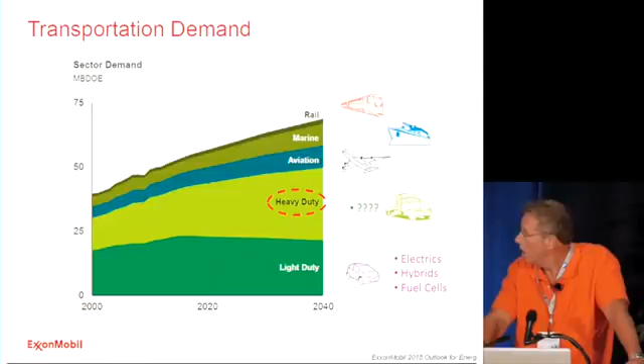If you look at that in terms of what it means for fuels, diesel is the fuel that people think of, but a diesel engine does not have to run on diesel fuel. Diesel fuel is a portion, a cut that you take from a hydrocarbon barrel that's really nice for doing this in the traditional sense. But if you do it in the sense that we do it, where we want really high efficiency, things that you would not think of as being good diesel fuels actually become very nice fuels. In fact, in my opinion, better fuels for a diesel than diesel fuel. So I want to separate the two, diesel style combustion or a diesel engine, from diesel fuel.

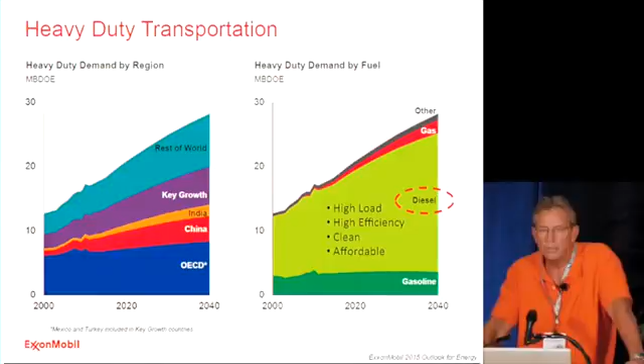What we need to do, if we're going to try and satisfy this in a way that fosters development and works for the environment, we have to handle high load. The reason why the diesel engine is used is the harder it works, the hotter it gets, the more this style of combustion likes it. You do this with a spark-ignited engine, you get knock. When you get knock, you pull the spark back, you lose efficiency, you lose power. It's just not really the right thing to do for high load. You want it to be high efficiency. Efficiency has sort of been rolled back as we've gotten better at dealing with pollutants. It needs to be clean, of course, and it needs to be affordable, and that's the other challenge - as you've begun to roll back soot and NOx emissions, the cost of the after-treatment system has become very high, and so we need a better idea.

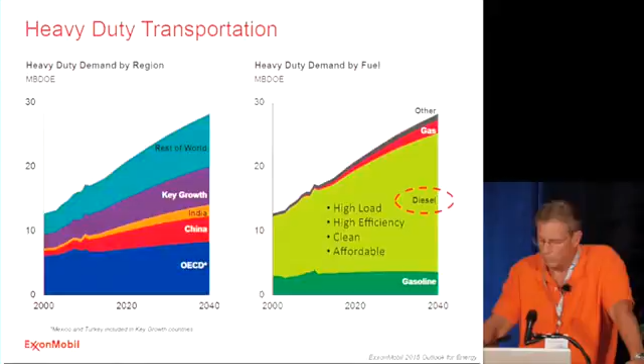Okay, so where do we stand in terms of engine efficiency? To the left, you have a spark-ignited gasoline engine. To the right, you have a turbocharged diesel, just mildly turbocharged, and this is pretty much what we have today.

I'll pull the glasses off, see if I can do it this way.

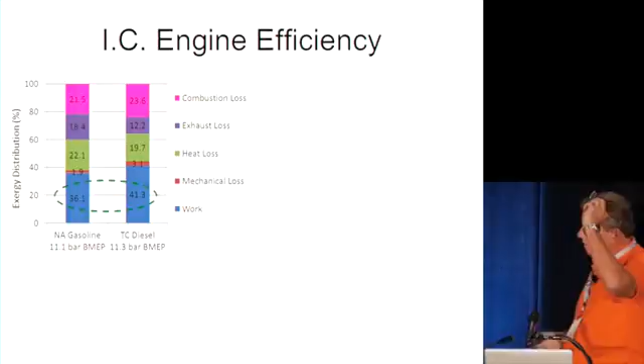If you look at the amount that goes into work, this is an exergy breakdown. Exergy is the amount of work you can get from a resource. The one over to the left is modeled roughly on a Prius sitting on its sweet spot, so about 38% efficient on a lower heating value basis, about 36% on an exergy basis. The other is a small bore direct injection diesel, 42 or so on an exergy basis, maybe 45 on a lower heating value basis.

The problem is the first 20+% of the work potential is gone because you do an unrestrained chemical reaction called combustion. If you do it perfectly, you kill 20% of your work potential just from entropy generation in the system. That's hard to go after.

You can only go after it either by changing from combustion to a restrained reaction, which is what fuel cells do, or by going to extreme states. That was another program we did for GCEP. You can get about half of that back in a combustion engine.

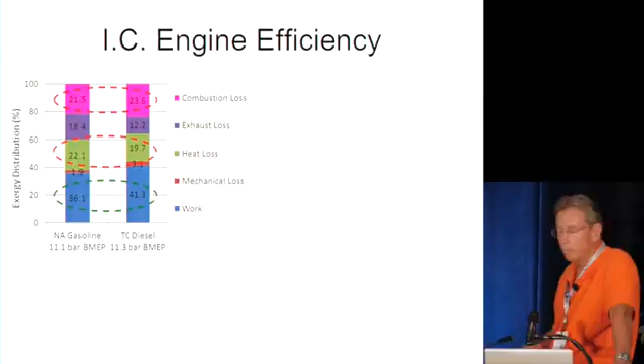But here's the part that really offends me: it's this part that's in heat transfer, because most of that energy is destroyed as you go across the thermal boundary layer before you even hit the wall. And so that's just got to go.

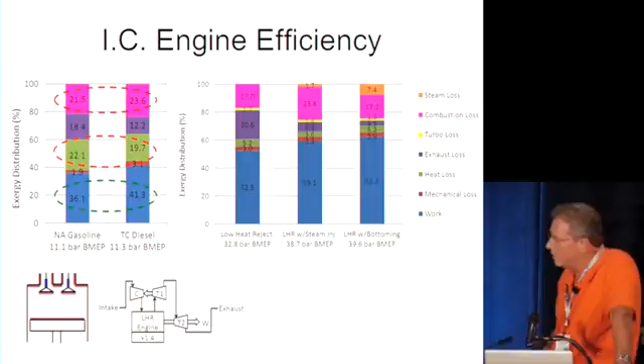So if you attack that with thermal barrier coatings, what are called low heat rejection engines, here are a couple of options. If you insulate a bunch of surfaces, the little graphic shows the same stuff sprayed on gas turbines, mostly YSZ, about 1 to 2 millimeters thick. That cuts the heat transfer losses, but it shifts most of that energy into the exhaust enthalpy.

So you have to be able to take that and extract it somehow, you have to get work out of it. Some of that you can get with a turbocharger, some from overexpanding. I'm a big fan of overexpansion because you don't want wickedly hot exhaust hitting the turbine stage on the backside. So to the extent that you can do those linkages, you want to do it.

And you can even turbo compound that. If you do that, you get the bar over to the left, where we're starting to creep up into some interesting efficiencies in the 50% range.

If you pull out all the stops and either do a regenerative bottoming cycle like a steam injection cycle, or put in a full steam bottoming cycle or an organic Rankine cycle depending on the temperature you have, then you can move over to the other side and get into the mid-60s. So really what we're after is how do you get to high efficiency.

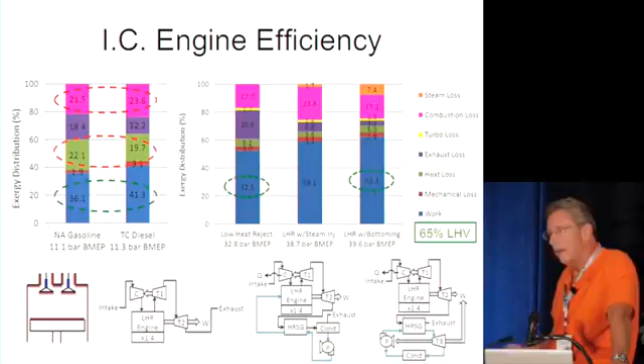Reality check: can you do some of these things? You can buy a turbo compounded engine from at least 2 companies. I don't know, maybe GE's got one lurking in the background too, you never know with them. Detroit Diesel and Scania both sell them commercially.

Lots of people have been looking at how you might package bottoming cycles. GE already does that for their large engines, but whether you can do it on board a vehicle is another question. People are looking at that.

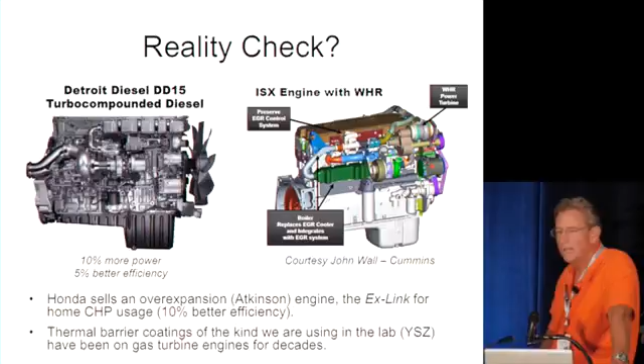There are Atkinson-style overexpansion packages. Honda's not selling it anymore, but they have a really nice geometry that does 1.4 times more expansion than compression, which fits nicely. And GE has been spraying YSZ forever on surfaces, so I don't really think that's a huge challenge.

If you go after the heat transfer loss, just because I want that exergy back and I want to make it more efficient, this is what it might look like for different pieces. You definitely want to do the head and the piston for sure. You really have to go after the valves and the ports, because you don't want to heat things up before they come in, and you have to transfer that enthalpy to whatever the next extraction stage is downstream. So it's not just about in-cylinder stuff.

But the other thing that you don't really care about, at least in my opinion, is the liner.

There was a big program in the 90s on low heat rejection engines funded by the Army, and it came to a couple of conclusions. Ceramics are really tricky. What are you going to do about the lubricants? And you've got to extract this energy out of it, and the combustion was a little hard to deal with.

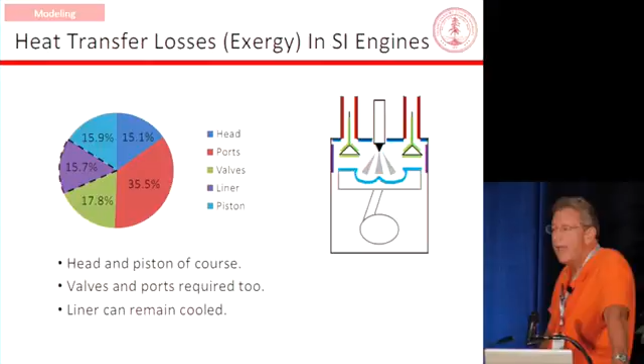In my way of thinking, you go for about half of the loss. You leave the liner alone, you leave the lubrication alone. You do the upper part, and you can get about half the heat transfer, a reduction of about half, and you redeploy that. How do you do that?

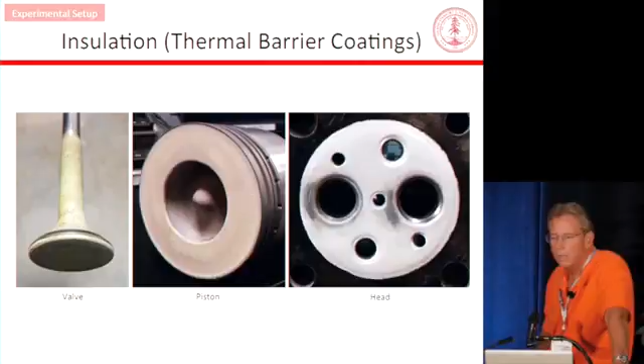You spray stuff on. So some of this is sprayed, some of this is cast. There's a whole bunch of different methods, but those are our valves, bowl and piston, that's our cylinder head, and basically we've got YSZ on those, a couple of millimeters thick.

Doing the experiments becomes a little interesting and tricky. We have single cylinder engines. We do all this stuff on a custom cylinder head that can take the pounding, the lack of heat transfer, all the crazy things that we do to it, including putting transducers and injectors in crazy places. We put the coatings on it and we measure what's going to happen. It's really good in that it can tolerate all these things and do crazy research stuff.

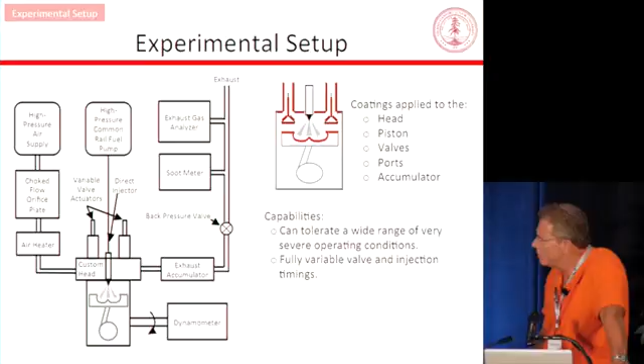We've got fully flexible injection and VVA and all that stuff. But there's some things you can't do with a single cylinder engine. One is you can't turbocharge it because it only breathes out once every 4 strokes, it only breathes in once every 4 strokes, and it would be a ridiculously tiny turbocharger that nobody would believe the results from anyway. But we can model turbochargers, so we modeled the turbocharger.

You'll also notice that we've got tiny little valves compared to a real engine because we've got real estate for fuel injectors and everything else, and we need structural support and all that good stuff. Our intake side we force feed it, so we're not worried about that, but the exhaust valve is small, so we have a very tight exhaust system. But that's okay, we can model around that too.

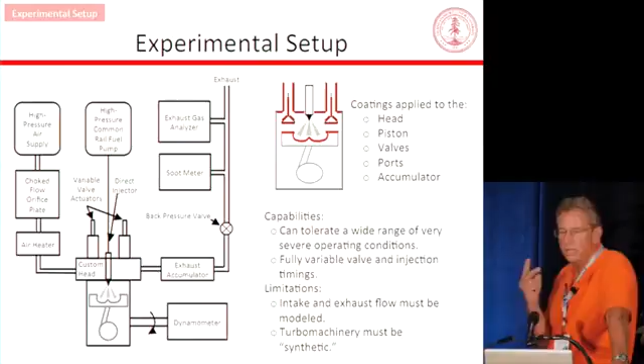So we do a combination of experiments and modeling to figure out what will happen. And that's really important. The stuff that you can easily model, we model. The stuff that you can't, and you've got to go to the experiment, is the combustion and the heat transfer. You've got to experimentally measure that. So it puts us in kind of an interesting experimental regime.

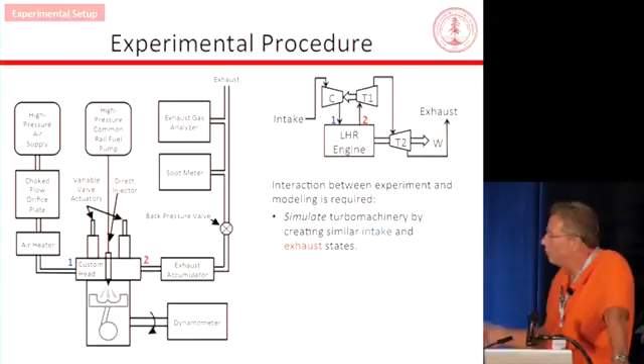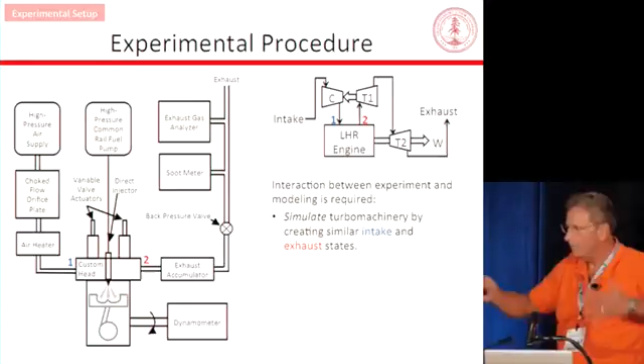So what do we do? We integrate those two together. We simulate the turbo machinery and we create simulated intake and exhaust states across it. We boost on the front side according to a compressor map from a turbocharger. We back pressure the exhaust to get the right amount of work with the efficiency on that. So we've kind of boxed in the combustion process in between those two.

Then we measure the heat transfer in the combustion process, because those are so nonlinear we're never going to model those with any sort of confidence. And we combine it, so we use our modeling to get back to what we think can happen in reality.

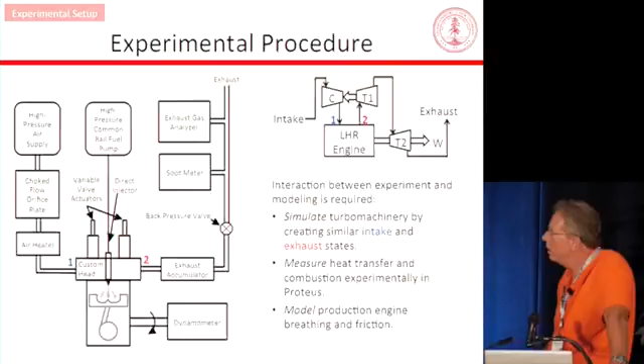In order to do that, you have to be able to model things. These are modeled and measured. For the actual experimental stuff, it's not that hard to do anymore. It's not a state-of-the-art thing. I teach people how to do this in class.

And so we get two sets of results, the research engine results at the bottom and what they would be in a production engine, sort of reasonable friction, turbocharger, valves, all that good stuff. And if you look, this is one of the cases with turbocharging. We can get the efficiency up about where it would be in terms of what our modeling would say, with a very significant increase in power density.

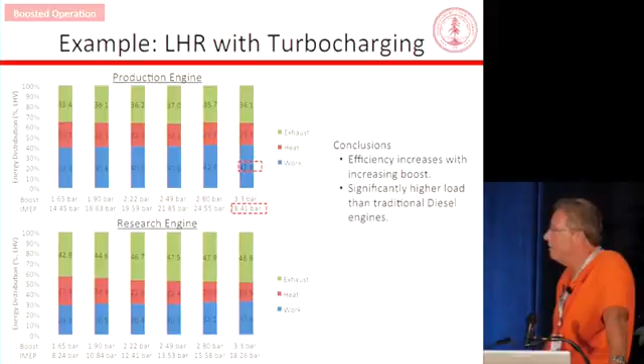So I don't really like the low temperature strategies. Low temperature strategies are great for some emissions reductions things, they cut heat transfer, but they cut power density. And engines are supposed to work for a living, so I prefer to raise the wall temperatures and raise the combustion temperature inside of it and get more work out of the engine rather than less. But basically it says that we're on track.

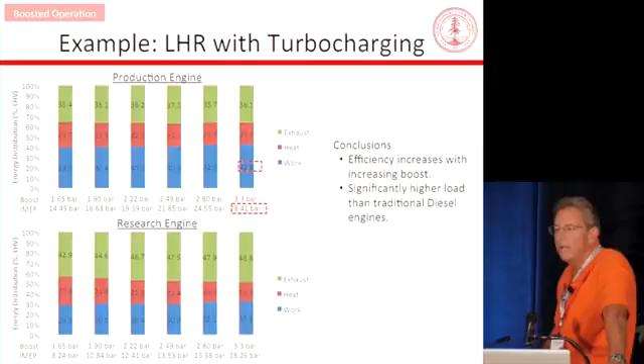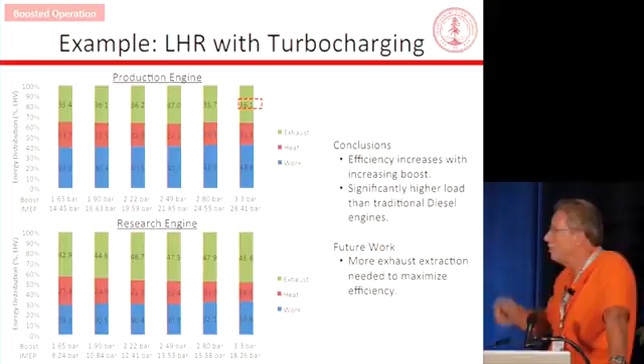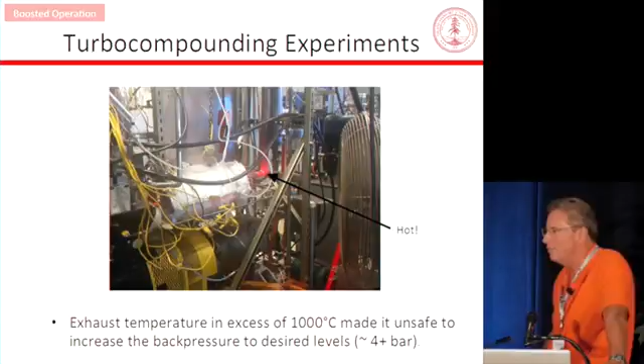We have a little more heat transfer than the 50% reduction we would have wanted, but it's also sort of Gen 1 thermal barrier coatings and all the rest. For sure, we need to do more extraction. Turbocharging is just the minimum version. Turbo compounding, we've done other experiments, but when you start to have significant enthalpy flows coming out of the back, as the graduate student who did this pointed out, it gets hot. And when it's hot at 1 bar, that's not such a big problem, but when it's 4 or 5 bar and made out of mild steel and starting to creep, you have to be a little bit careful about that. But that's okay, we learned what we needed to learn from that.

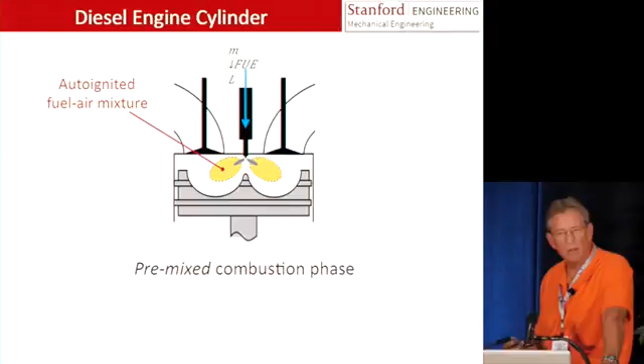Here's the 30-second version of where soot comes from. You've got an injector inside the cylinder. You squirt diesel fuel, pretty reactive, into very hot air. It doesn't ignite immediately, so it mixes a little bit, forms a little plume. That plume goes off, okay? It's called the premixed combustion phase. That's not our problem in terms of emissions. That's a bit of a problem if you talk about knock or being noisy in a diesel, but it's not really our problem. Our problem is when you burn the rest of the fuel in there, the mixing controlled phase.

You've got fuel down the middle, the oxygen's on the outside. You've got to get these two to meet each other. If you don't do it, you crack the fuel. Thermodynamically, it wants to become carbon and hydrogen. It's not going to get to thermodynamic equilibrium, but it's on that path, and that's what's driving it. And that's why you're going to make soot.

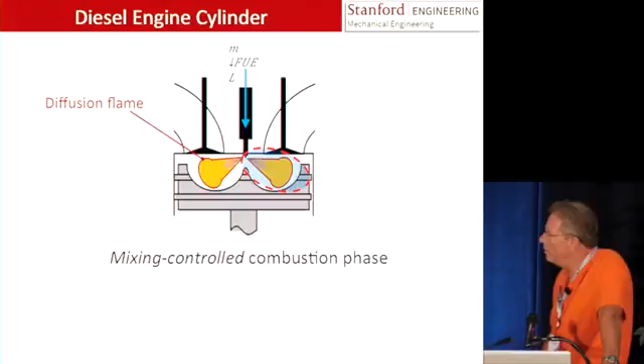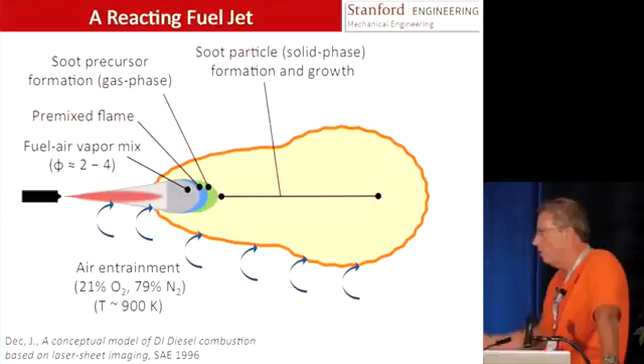Probably the easiest thing to do in terms of having diesel-style combustion and not having soot is make sure that the oxygen-carbon ratio is unity. If the oxygen-carbon ratio is unity, you can be pretty sure you can avoid soot. The cheapest way to do that is to hang an oxygen in the middle of the fuel chain. It's got to be in there so that when you break the bonds, the oxygen is available.

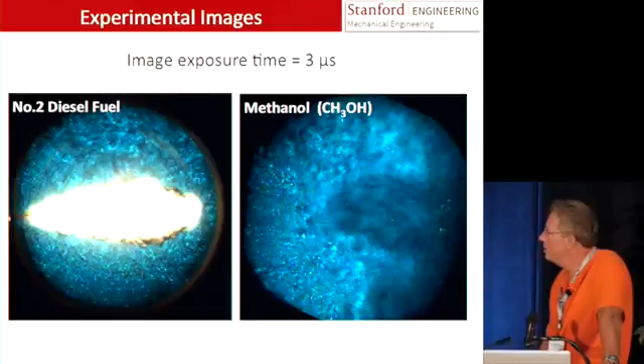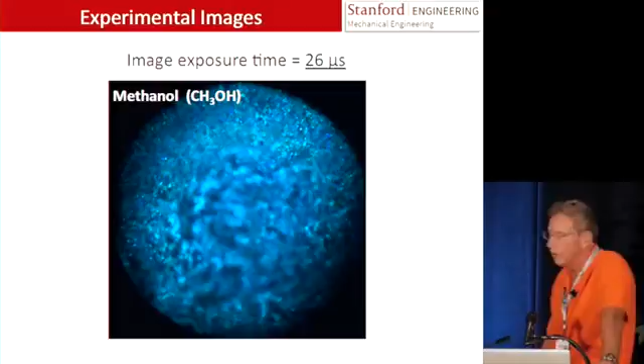Methanol does form soot, so the idea that it is a sootless fuel is incorrect. If you rearrange the exposure so you look more carefully - this is very, very clean, no additives, reagent grade stuff - you look a little more carefully at it. In the middle of the chemical soup, you will form soot, but you also burn the soot back up again. And that, of course, is the key, is to not have any net soot out. You'd also like to not have the soot so you don't have the radiation heat transfer losses, but that's sort of a secondary effect.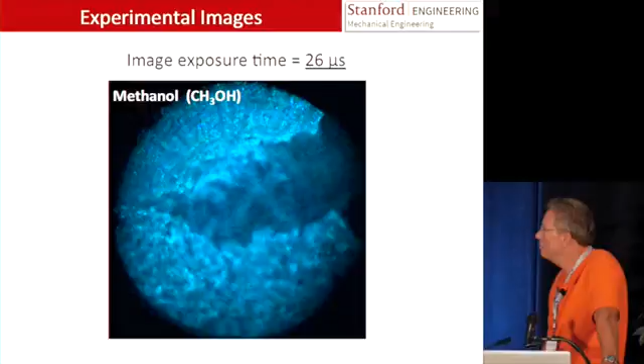So there are some ways to go about this. In order to figure out what happens, you need to actually measure this. It's way too complicated to model.

If you look at diesel and methanol, as you looked at some time ago, with diesel, as you go richer and richer, putting more fuel into the charge under higher load conditions, you make more and more soot. Traditionally you'd be limited at around 0.7 to 0.75 equivalence ratio because you make that big black cloud and your combustion efficiency goes down. You'd say you can't run the engine there. That would be inappropriate. The limit is down there.

So diesel is just kind of off the map unless you put a diesel particulate filter, and what you're going to need to do for the NOx and all the rest of that.

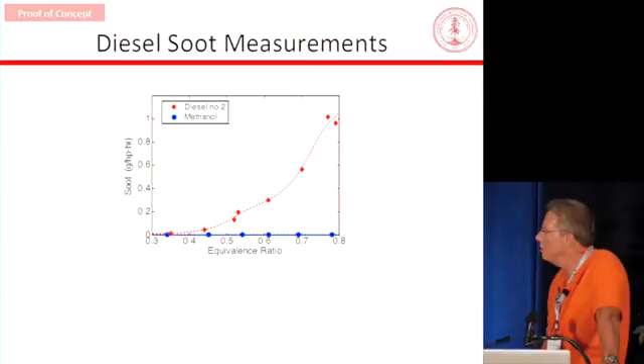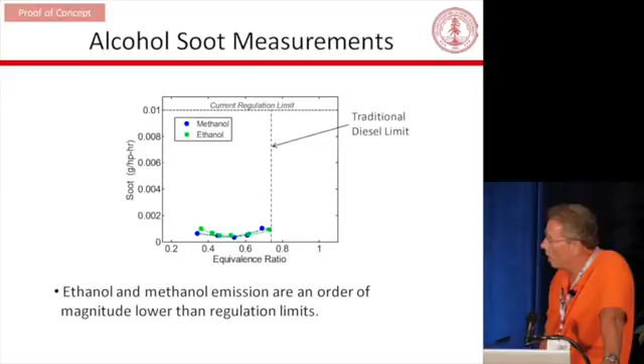If instead we zoom up or down by a factor of 100, so the standard is now at the top of the page, we've got methanol and ethanol over the typical range you might run a diesel, a factor of 10 below what the standards are. The nice thing is that if we push out to stoichiometric, we're still a factor of 10 below the standards. We're basically at our measurement limit for the methanol, and a factor of 2 below even for ethanol. So now we've gone from 2 carbons to 1 oxygen atom, to something that is deployed.

Now it's true, there's not a lot of E100 out there, and that's what we're using here. Personally, I'd rather have wet ethanol. It'll be interesting to see whether we can do this with E15. But that's, I think, going to be for Burak to figure out.

But the reason for doing that is if you can go all the way to stoichiometric operation, it means you get to use a 3-way catalyst for NOx control. That's the same 3-way catalyst that's on your car, and it's pretty darn cheap compared to an SCR and a DPF system. So that's what we're after.

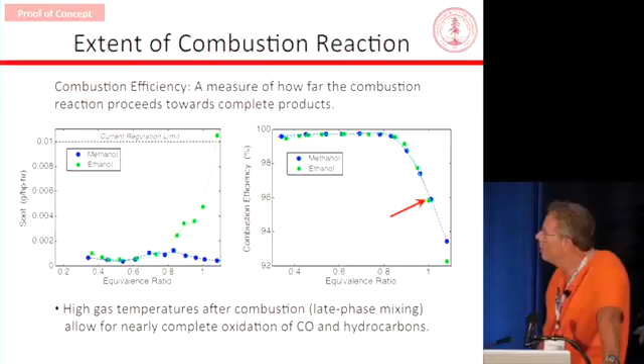The other thing that comes along with that - combustion efficiency is still high, if you care about that, I'll talk about it more later. The other thing that comes with pushing to stoichiometric is you get 30% more work out of the engine. So you don't go to half the power density, which is what you get with LTC approaches. You get 30% more power from the base engine doing this. So I kind of like that. I think that's a good thing.

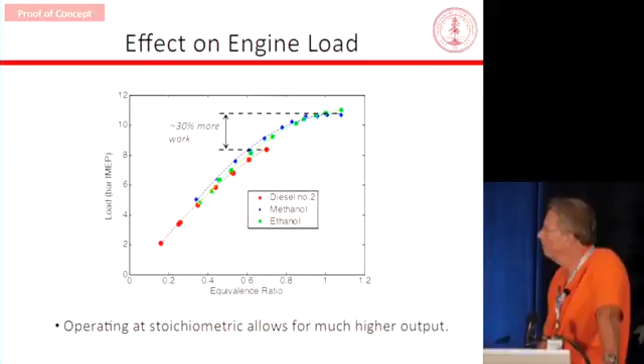Okay, where do we stand on all this? So methanol and ethanol we've looked at, and what we mean by, quote, sootless - nothing is sootless. Sootless is whether or not you're well below what the limit is. So that's how I'm using the term here, but I don't think anything is particularly sootless in these conditions.

So that we've seen. Interesting thing, we lost a picture in there. Now that's neat - where did the methane picture go? Okay well, that was a picture of methane, and the picture of the methane looks a lot like the methanol and ethanol picture.

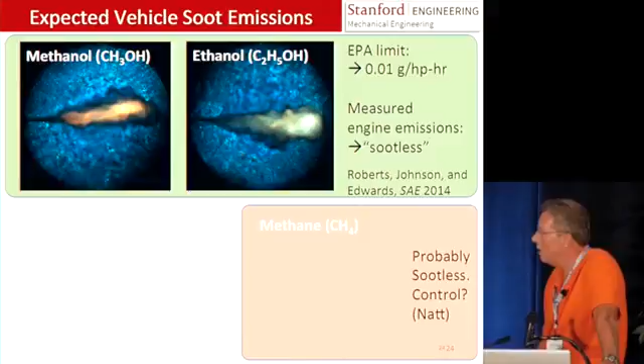So while we haven't run it yet and done measurements, which Natt will do - wherever Natt is - that's probably going to be down where it's below the sootless limit. It's not the oxygen in that case, it's the hydrogen-carbon ratio. It's the hydrogen atoms in that.

But that provides an interesting thing, both in terms of the interest in natural gas and a really nice test bed in terms of looking at the 3-way catalyst. How do you do the control? How do you do the combustion shaping and get the stoichiometry right for balancing off the NOx emissions, which is part of our overall strategy.

Next step, you might say, why on earth are you interested in normal propanol? Just because we're talking about 3 carbons to 1 oxygen. So pushing this to make more and more soot on the margin so you can then work on techniques to mitigate what's going to happen on the margin.

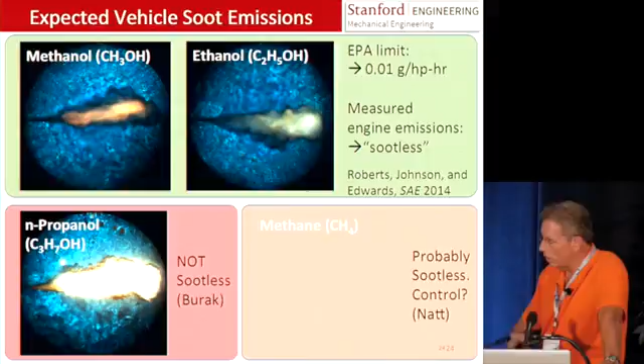Natural gas is not methane. It's got heavier stuff, some C4s in there, things that are going to produce soot. Even the ethanol is only a factor of 2 off the limit. But when we're down in that region, what can we do with multiple injections, some of the other approaches, to get us down below where we need to be again? So that will be Burak's challenge for that.

So a couple of conclusions.

Combustion can be made sootless, diesel-style combustion. Just don't use diesel fuel. Or if you use diesel fuel, make it into something else. I think John might mention that in his talk later on today.

Transform it to another kind of fuel, like syngas. Efficiencies greater than 60% are possible. Now that's sort of a fuzzy statement. Greater than 50% without being too crazy. Going over 60%, you've got to get into bottoming cycles and highly regenerative sorts of things, or do something completely different.

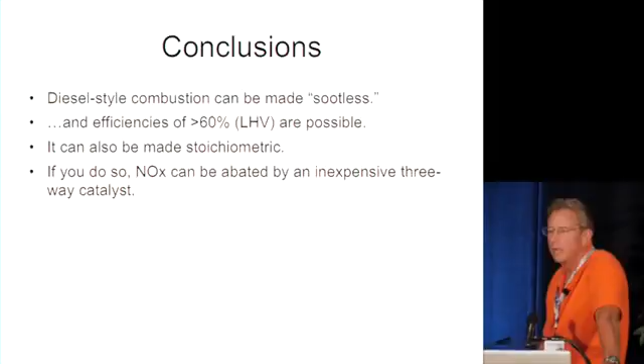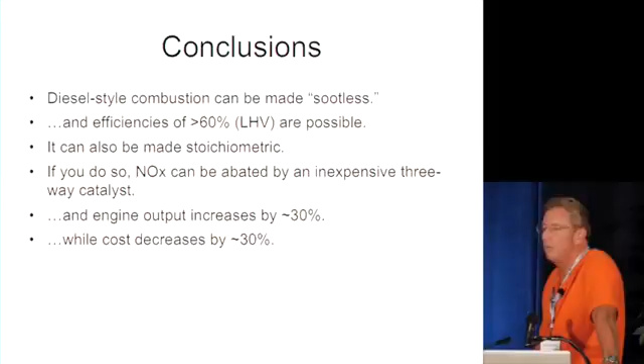It can be made stoichiometric if you want to go there. If you go to stoichiometric, you can go for an inexpensive 3-way catalyst. You already have to have an oxidation catalyst on the vehicle anyway for CO and hydrocarbons, so why not go 3-way for that? And if that's the case, the output goes up by about 30%, and the cost goes down by about 30%. And that's based upon heavy-duty, big rig, DPF plus SCR systems, a significant fraction of the cost, 30% of the cost for one of those engines.

There's the alcohols, there's natural gas, dimethyl ether, which is the easiest one. You don't have to be high temperature for that, but we're high temperature anyway, so these all become nice things for us. Syngas by in situ reforming, and probably some other interesting things could all be sootless fuels.

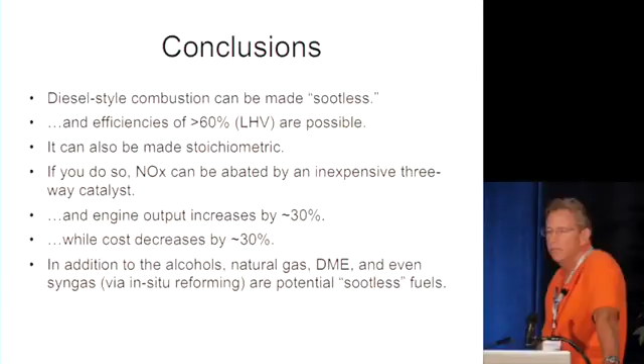I think this is the only GCEP talk I've given that was actually on time in 15 years.

Here comes the layman again. You're saying that you can make it sootless by changing the fuel. That's basically getting away from diesel, reducing the carbon density.

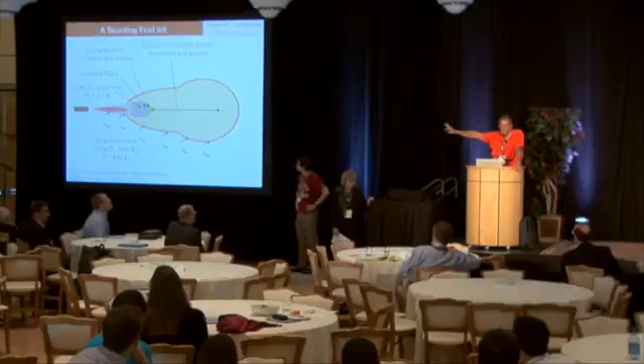Go back, wait. Okay, so liquid comes in from the side. It vaporizes. It transfers momentum to the air, which sucks air in. So from the left-hand side, we've got fuel running down the middle, sucking air in, making an equivalence ratio, a local air-fuel ratio that's like 4 times as much fuel as you want relative to the amount of air. So it's really rich inside. And that stuff is hot. That stuff cracks, and it goes off to start making soot.

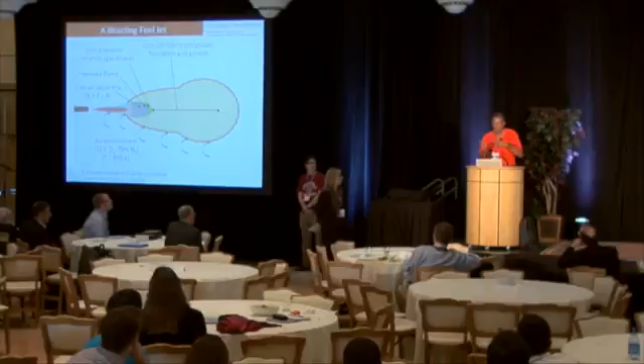Well, I guess what I'm asking myself is why don't you change the shape of the fuel and air and ignition, the premixed flame coming in? Perfect. So a lot of what you do is you try to do clever things with holes and separations to get higher entrainment rates or change the liftoff of all that. And all of that is the kind of stuff you can do to make changes to the system. They will not be big enough to get diesel fuel to be sootless. You need to do something much, much bigger. But those are the kinds of things we'll need for dealing with variability in natural gas, E85, those kinds of things, I think.

I was assuming that... And there's lots of work on that going on. I'm not quite sure of this statement, but with the very low cost of methane, I presume methanol would be a cheaper fuel to make. I'm not sure that's true, methanol.

From natural gas, it's a pretty straightforward fuel to make, and there have been lots of arguments about the economics of that, even for small-site kinds of stuff. I think the bigger question is the whole infrastructure issue—whether or not we're willing to commit to a methanol infrastructure. All right, thank you.

I was wondering if you'd had a chance to evaluate Eddie Sturman's diesel engine in Colorado. He's well into the 60% efficiency range using very precise digital valves that let him do unusual, even multi-event combustion sequences, with quite different mechanics than a conventional diesel. Yeah, so there are systems that can get to high efficiencies—they're typically combined cycle systems that achieve that, not simple cycle systems. Well, I doubt that, but I'll be happy to look at it.

A quick question, Chris. You talked about many different oxygen-containing compounds, and about methane. Would you like to elaborate on whether LPG could be used? That's propanes and butanes, and it's particularly relevant because there seems to be a large amount of LPG available at depressed pricing today. Yeah, I think by the time you get to LPG you're already in the normal hydrocarbon kitty, so things aren't going to look that different. I have to say, my aspiration is to take it and convert it into something else on board—do thermochemical recuperation and make syngas out of it, which I'm pretty sure will be sootless. We'll have to show that. We've done preliminary work on it, but you actually have to put it through an engine and measure it to confirm. But part of that, I don't know—will you talk about it, John, or not?